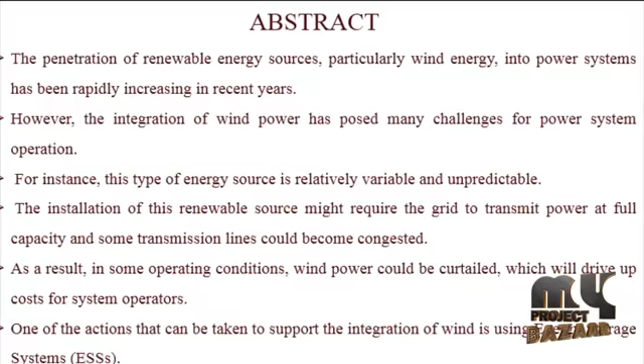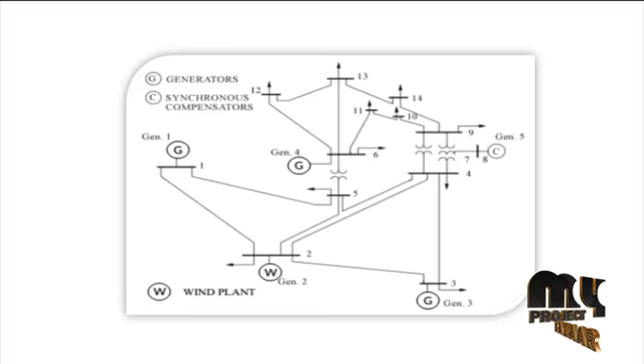The optimization is carried out on the total generation cost, which represents the TSO's point of view. In other words, the goal is to improve system operation regardless of the revenues of the single companies operating wind farms. The energy storage system therefore can be installed at any bus by the TSO in order to maximize the efficiency and security of the overall system.

Moreover, the total time horizon considered, which could be either 1 week or 1 month or a set of representative weeks of the year, is discretized, and the hourly operation is optimized considering the presence of the energy storage system. A multi-period approach is necessary to properly model the intertemporal constraint characteristics of the energy storage system. A multi-period AC optimal power flow model with energy storage system integration can be formulated as follows.

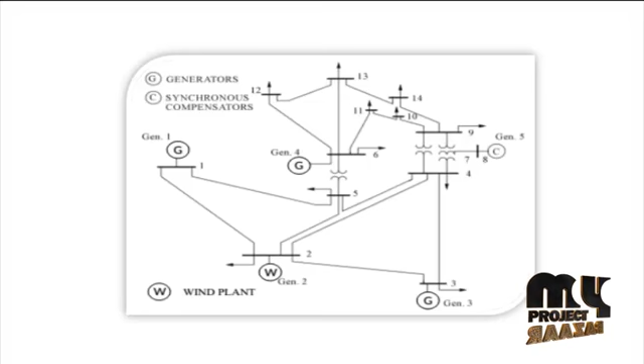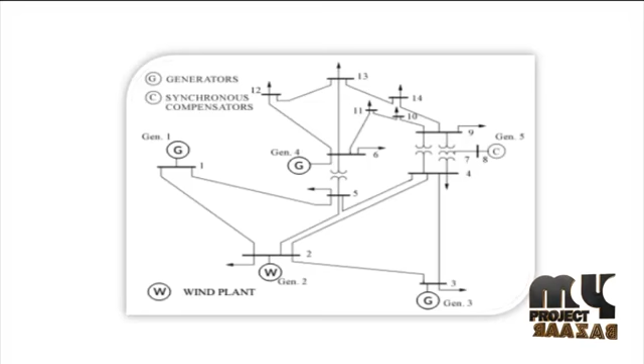The objective function to be minimized in the model is the total production cost, using as control variables the energy storage system charging and discharging power and the generation output of all dispatchable generation in each period. In order to take into account the variability of load and wind, two possible approaches are available. The first is to run the model on a longer time frame, 1 year. However, the tractability of the resulting problem is subject to the size of the system.

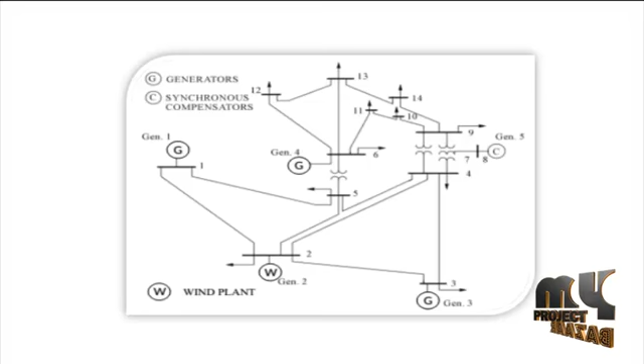The second approach, which is typically used in power system planning, is to run the model on a weekly basis, considering a number of weekly scenarios representative of the most significant loading and wind conditions: high wind, high load, high wind, low load conditions, weighting the result based on the weekly energies. Therefore, the value of T depends on the time horizon adopted in the planning problem.

Next, we see about the running process of our project. This proposed implementation is done in the MATLAB environment, in MATLAB M file coding. We solve the objective functions using the given equality and inequality constraints. First of all, we consider only the available IEEE bus systems. We use two kinds of bus systems in this implementation: one is the 14 bus system, another one the 118 bus system.

In this process we did only the client requirement, and the corresponding output waveforms are presented here. The 14 and 118 bus systems have data of sending end and receiving end branch values, bus data values and generation cost values, which are given in the available IEEE bus system data. That data is considered to solve the formulation of the objective function.

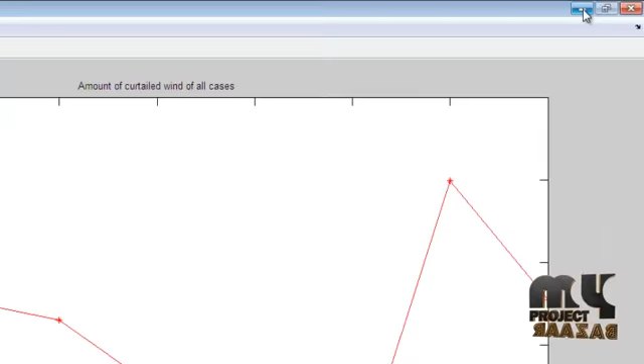After formulating the objective function using the constraints, the waveforms are plotted using the general commands. The first one is the amount of curtailed wind of all cases, plotted between wind in megawatt hour and case. The next one is the production cost of all cases, drawn between cases and cost in dollars. Five kinds of waveforms are drawn in the production cost.

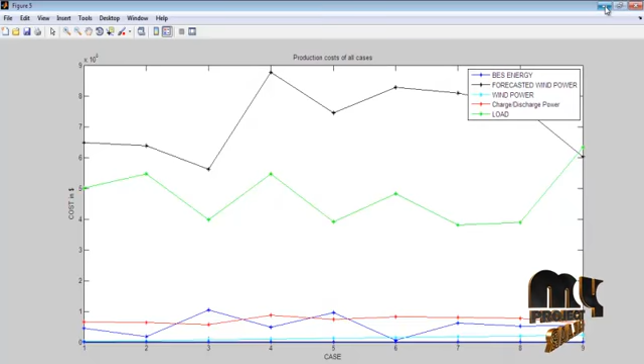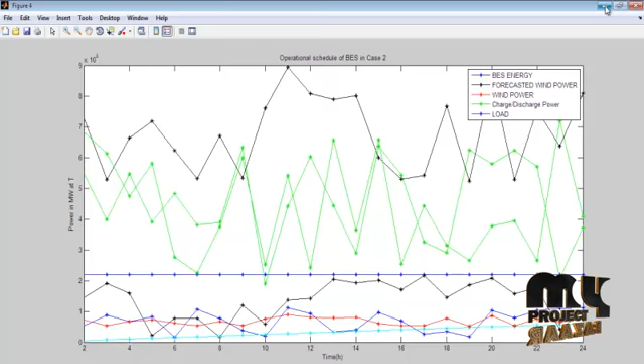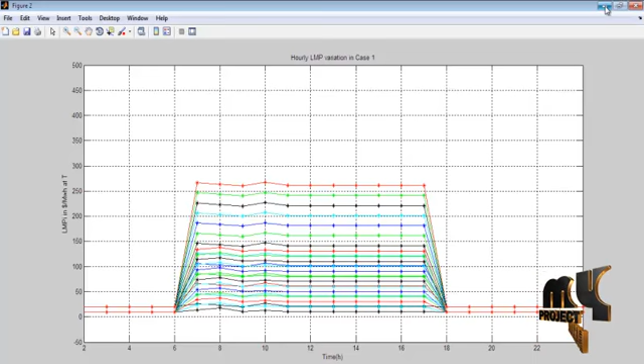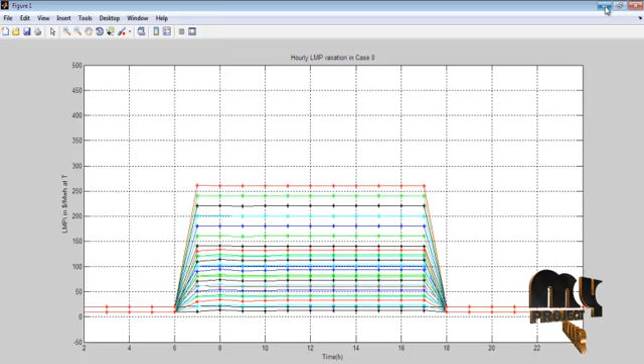The implementation is similar for the 118 bus system, and additionally some cases are added. These are the outputs of the corresponding process.